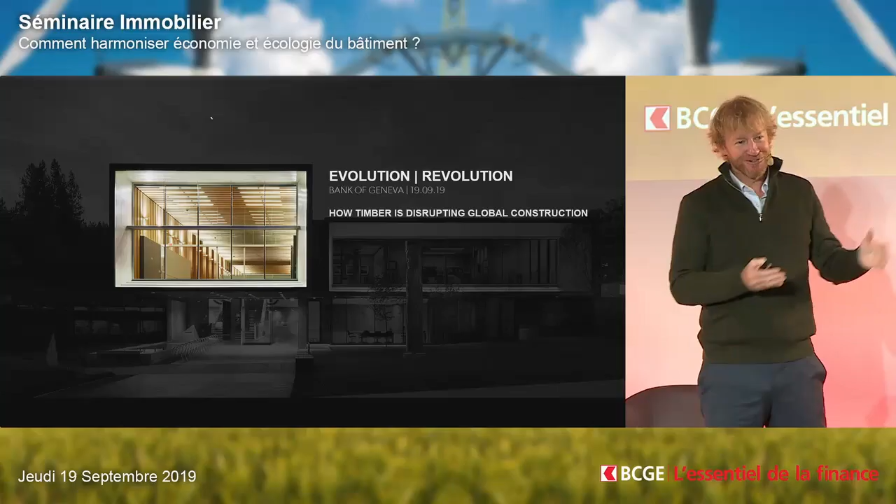Thank you for having me. My apologies, my French is not that good. I am from Canada, from Vancouver, but I grew up near Quebec, then on the west coast of Canada. Truthfully, you're better off learning Cantonese or Mandarin than French now, so I've lost my French, my apologies.

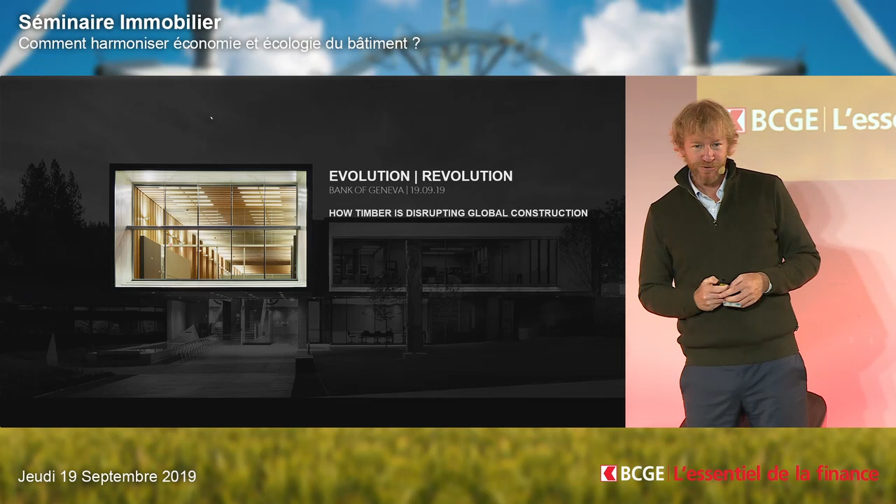It's a pleasure to be here. I'm going to talk to you today about wood and my architectural practice, and why we have chosen to be dedicated completely to the concept of building in wood. I call my talk Evolution Revolution. Wood construction is something we have seen for centuries, but not as much in the last century.

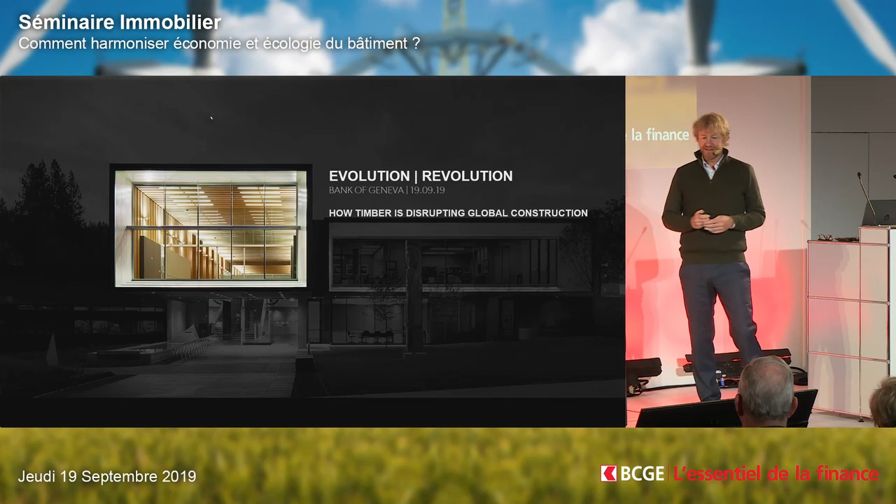And here in Switzerland, there's a great history. Why is this not moving forward? Well, we're not moving forward.

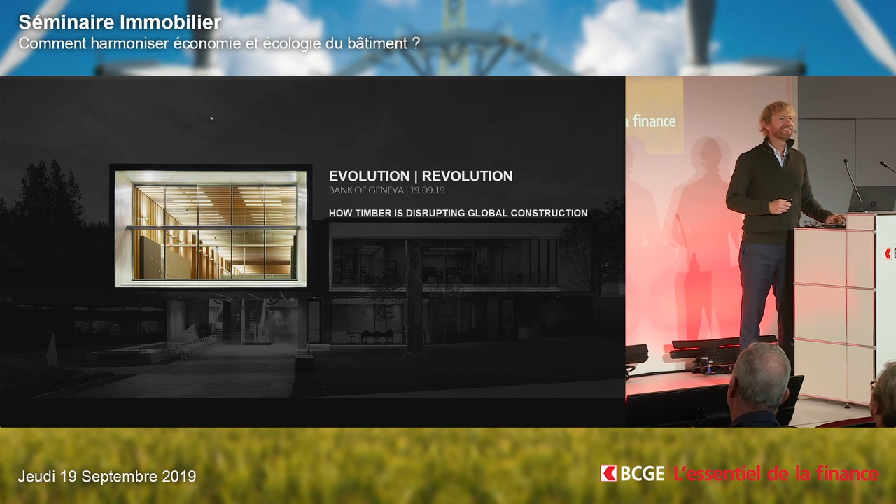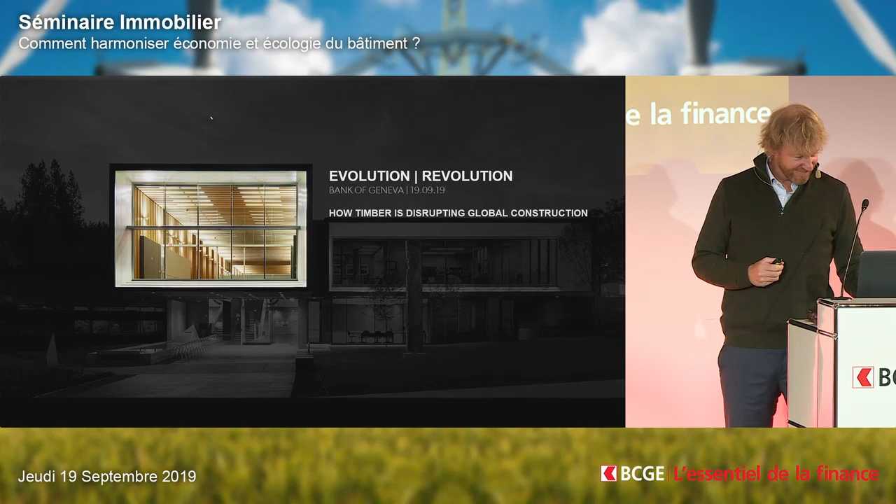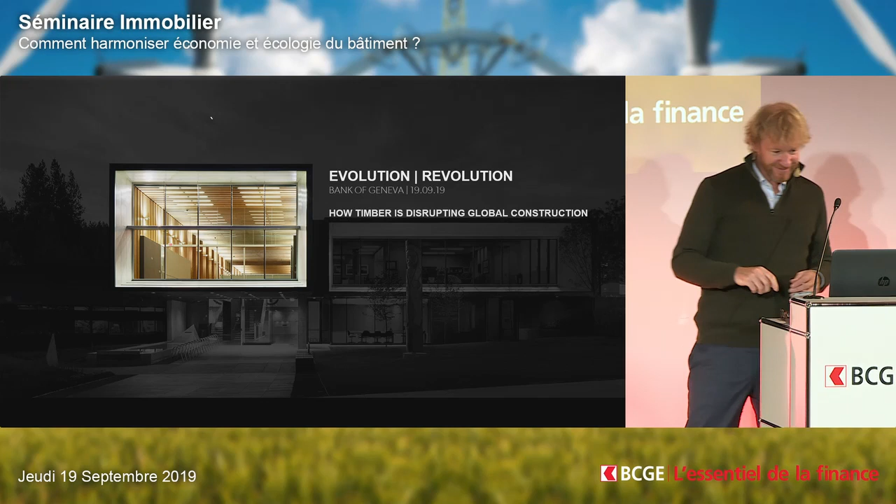I'll do it here. I'm frozen. Hold on, it was working before. I just froze, that'll help. I can do this entire talk without having any pictures, but the pictures are way better. So sorry guys, can somebody come give me a hand, this thing's not working? Oh, perfect, it's weird. Let me just talk while we do this.

So I started my practice in 2003 originally, and we were just a regular architecture practice until about 7 years ago, when I'd built a lot of things in wood and really started to understand what and why wood was going to become something that I felt this next century needs to focus on as a building material.

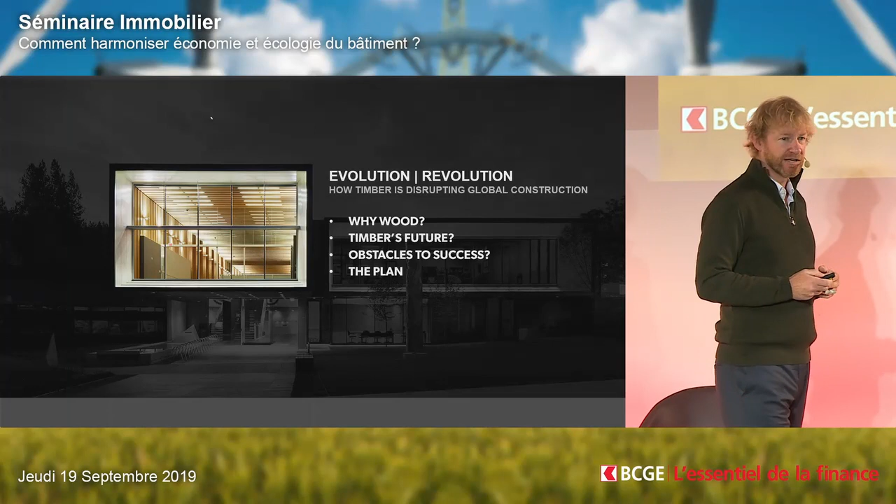So I'm going to tell you the story of why we are building in wood. As mentioned in the introduction, I run this firm, Michael Green Architecture. I also run this school, Design Build Research, which has a program called Timber Online Education, where we're trying to create a global free education program translated into 35 different languages, to change the entire system of building worldwide, educating countries especially that need to move towards greener building materials, like China, India, Indonesia, Brazil, and so forth. So we've built this program.

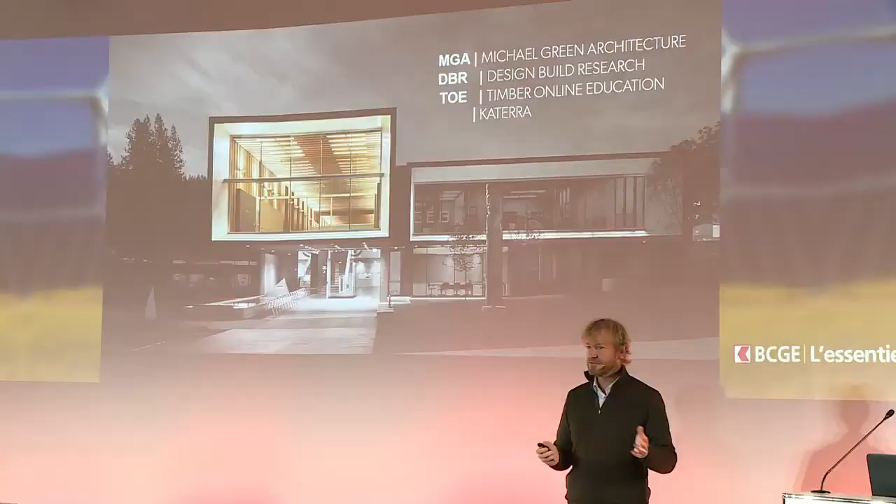And then finally, my practice, I actually sold it to a company called Katerra a year ago. So I still run the company fairly independently, but we have a relationship with Katerra, a Silicon Valley company about 4 years old now, that is trying to create shifts in both technology and off-site construction. I'm going to talk a bit about that because it's an important step that's starting to happen in the United States and elsewhere, especially here in Europe, but now finally in the United States.

So here we are, and I'm going to describe it, but 7 years ago when I started, I bought one of the first pieces of what's called mass timber. That piece of wood right there, that's my staff moving into my office when I started the firm, and that's what we call mass timber. Mass timber is the word we use for large panels of wood. Cross-laminated timber is something you've hopefully heard of already, but it's the change that's coming to our industry: these large panel products in wood.

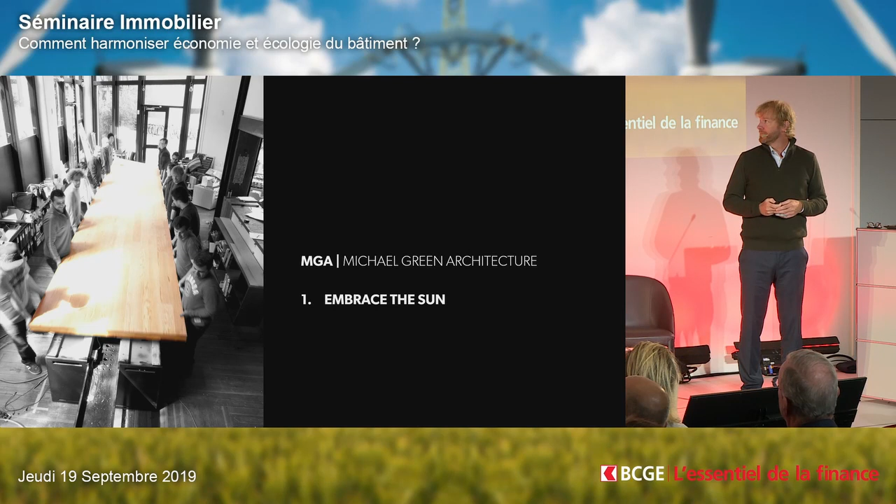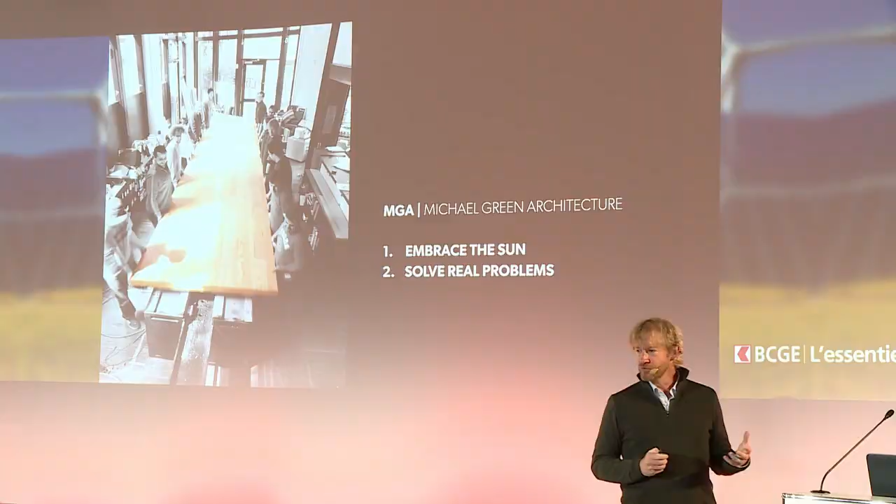And when I started the firm, we came up with a series of values we wanted to speak to. The first is embrace the sun. We only work in materials ideally grown by the power of the sun, so obviously wood is one of them.

We try to solve real problems. We try to innovate and share, which is why we have our school.

We believe that Darwin was right. What I mean by that is evolution, and Darwin's work, taught us that all species, flora and fauna on Earth, are fundamentally here to thrive and propagate while using as little energy as possible, and to find evolutionary ways to use less energy. The only species that has not done that is us, as humans. We do the best to use the most energy and then destroy ourselves. We're very good at this, but this has to change.

So our practice is focused on the idea that we design to use less, not more. And then finally, I always say that we have to be Canadian. What I mean by that is the work we design, as you will see, is very simple. It's very quiet. It's not trying to say, look at me.

It's trying to say that we need to be good neighbors. And that's, for me, what great architecture should do most of the time. Sometimes we should celebrate buildings, but much of the time we should be very humble and honest and quiet. And I think those are good Canadian values, so I always say that.

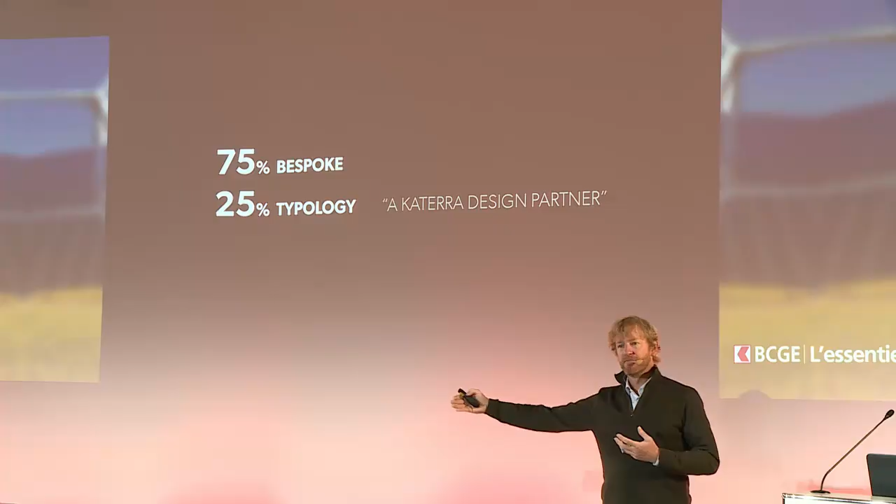We build projects all over the world. We're very lucky to do so, and about 3/4 of what we do are custom projects, and about 25% are what we call typological projects or repeatable projects. And that's where we found this interest in working with this company, Katerra, who are starting to look at the idea that buildings can be a product, not just one-off prototypes all the time, but actually something we can create some repeatability around to reduce the cost, which we think is important.

About 90% of what we do is mass timber, and about 10% is what's called light timber, light wood, which is what you see in North America a lot. It's less common here, but it's a very common way.

So the two main values of why we run the firm are climate and social impact, but really I'm here to tell you the story of why we build in wood.

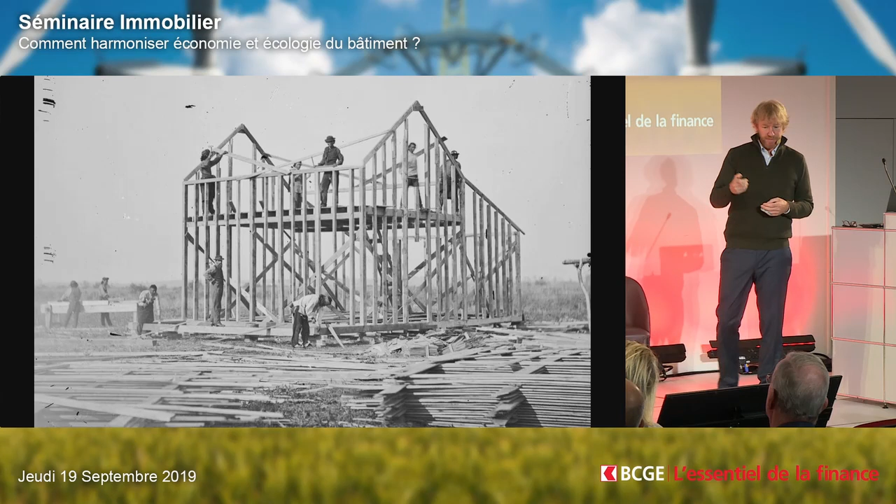In North America, we have been building in wood like this for 300 or 400 years. And really from the beginning of what we call the First Nations people, the Aboriginal people of North America, building in wood, there's been a change only in small ways throughout time of these lightweight wood buildings, eventually evolving into where we are today, which is advanced wood and mass timber.

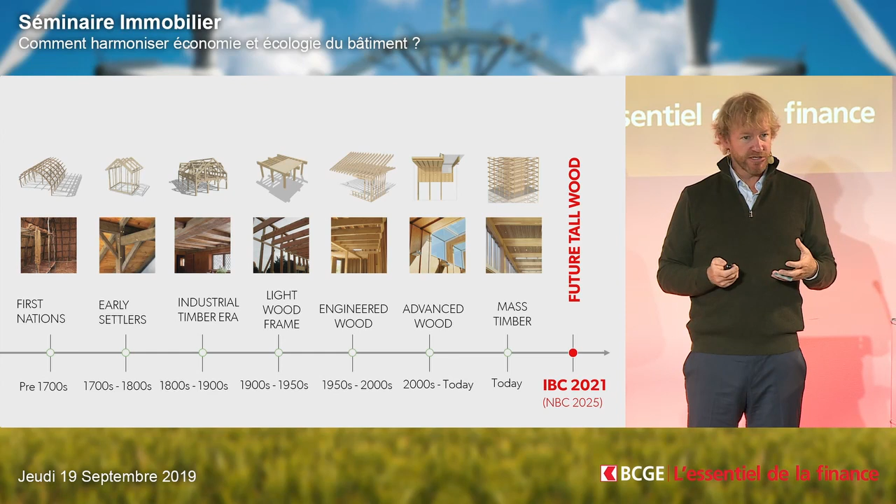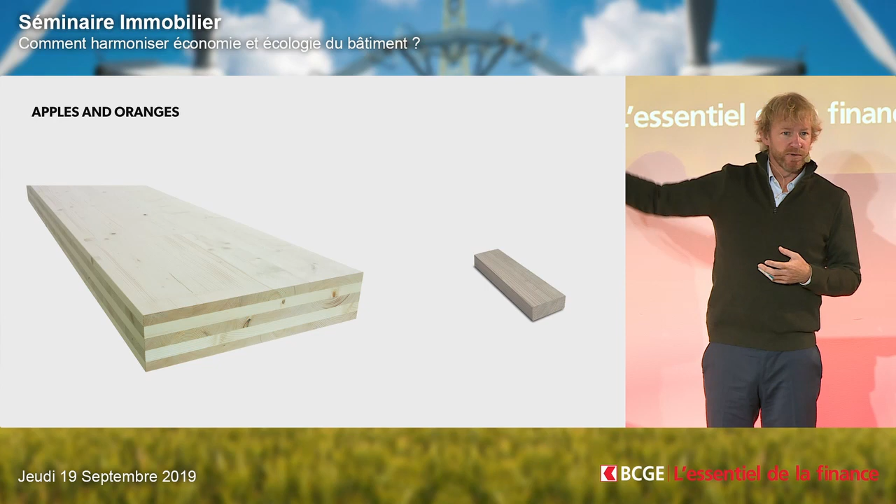Mass timber really started in Austria, in Germany, and to some extent here in Switzerland. It's a material that started to shift the way wood would be brought into buildings in Europe, but really around the small-scale residential market. We became really interested in mass timber because we were used to these small pieces of wood, and we were interested in what these large engineered wood panels might do for us in the construction market. It's really apples and oranges, because, of course, these big materials, when they burn, they're very resilient to fire, which means we can think about building much, much bigger buildings, which is really important.

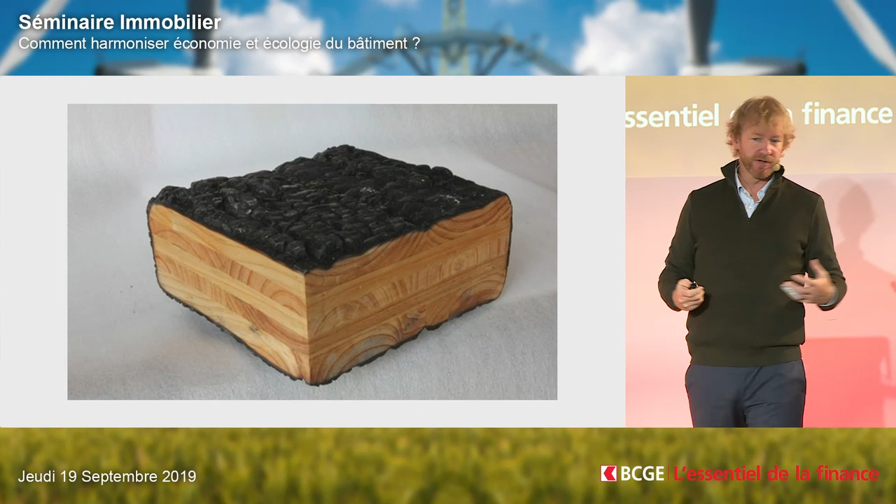So there's a whole bunch of types of mass timber. I won't spend a lot of time, I can answer questions about it, but these are all the different products that are now available, many of which are made here in Switzerland and made especially in Scandinavia, of course.

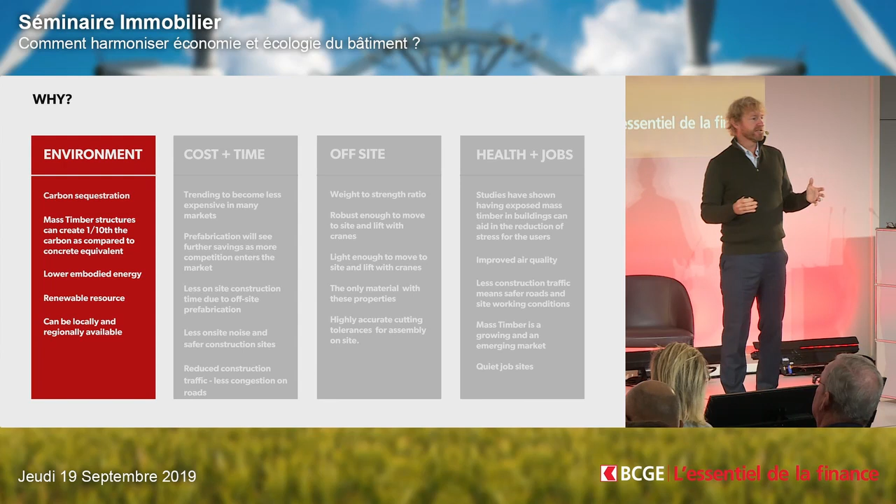But what I'm here to do is really tell you this story. What is it that makes us so passionate about the idea that my entire practice is dedicated to wood? I think we're the only architectural firm in North America that has said we are only going to work in this material. And it's these four things: the environment, cost, and offsite, and finally health and jobs. So let me take you through them.

So I'm going to walk you through the story. But first, for me, the biggest passion I have around the use of wood is about the issue of the environment and how we have to change.

So I'm sure you know these statistics. My apologies if you know them very well, but I'm going to repeat them because I think they're important to all of us in the room involved in construction. This is what we should be thinking every day.

Our industry is responsible globally for 40% of greenhouse gases, depending where we live in the world. In Canada, it's 50%. In the United States, it's 50%. I don't know what it is here in Switzerland, but I imagine it's probably close to 50% of the issues of climate change are related to our industry.

It breaks down like this. Many people think it's about transportation, and of course it is, but buildings are the primary issue. And when we think about that 39%, close to 40%, about 11% is the materials of the building, the embodied carbon, and 28% is operational. We talk about operational, how you heat and cool a building, all the time, and it's a very important issue. But what we don't talk enough about is what we make our buildings out of. I'll explain now why I think that's actually the more important issue.

But it relates to this, the scale, right? As a building industry, this is how much square footage—sorry, it's in square foot.

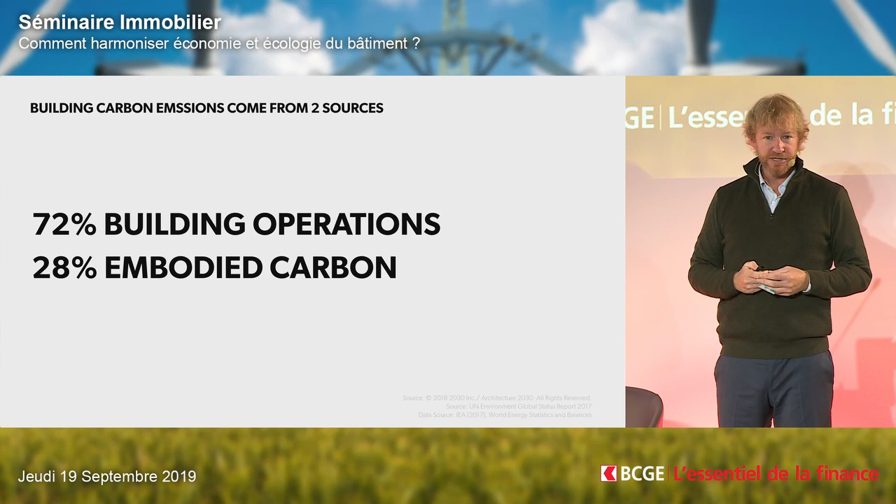So when we break down individual buildings, about 72% of the carbon footprint is operational, and about 28% is embodied material. And so people often say to me, well, why aren't you just focused on the operational? That's the majority. Well, the reason is because of what we call the time value proposition, and this graph really gives us a good idea.

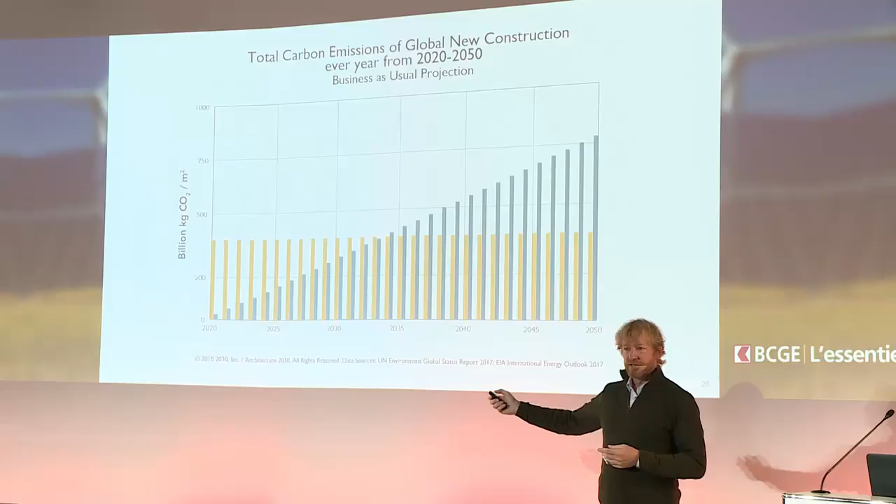The first day you build the building, you've built it with the materials - that's your embodied footprint. So day one is the yellow on this chart. Of course, over time, heating and cooling is adding up your carbon footprint. The intersection of those points, in this particular example, is roughly in 2035.

So for the first 15 years in this example, the most important issue is actually what the building's made out of. Now, by changing our sources of heating and cooling, our energy sources towards green energy, we have the opportunity to reduce the curve on the blue. But currently, we have no conversation really happening globally about the fact that day one, the embodied impact is our carbon footprint and is currently unchangeable.

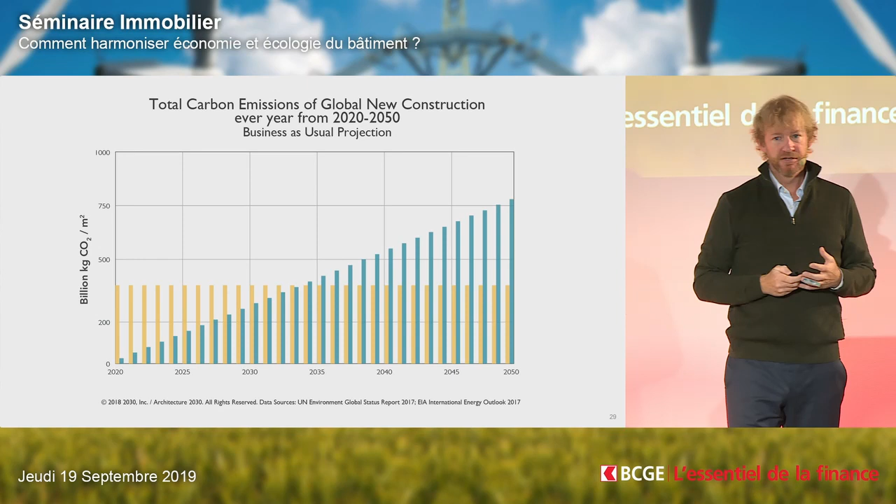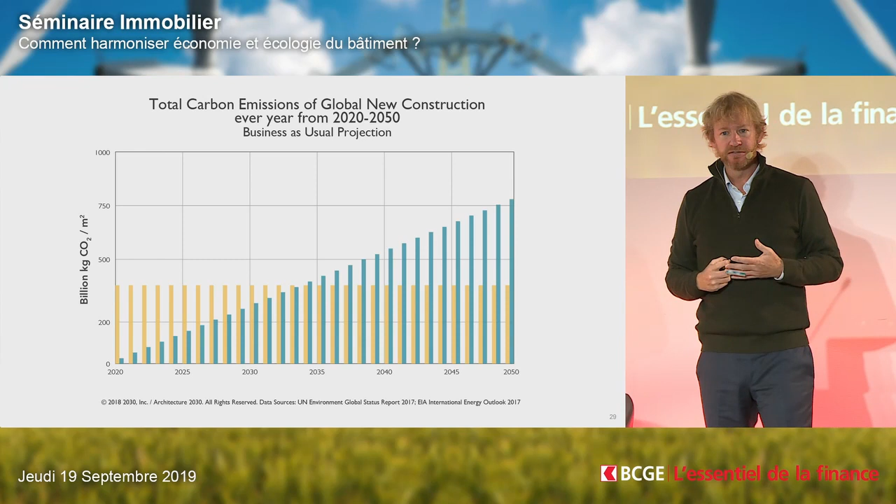Every material you put into a building, unless it's been grown by the power of the sun, has a very large carbon footprint. So there are materials that are inevitably going to go into the building: glass, aluminum, steel, concrete. These materials have high carbon footprints. So I'm always looking for opportunities to flip that around.

Now, again, you probably all know these statistics, but I like to just put them there, and that's the IPCC's focus on telling us how do we get to 1.5 degrees centigrade change over the next century. This was the goal that IPCC told us. To get there, we need to peak today or next year, and be down 45% by 2030, and then net zero by 2045 to 2055.

Now, I understand Switzerland has a goal of 2050 being net zero, and how you get there is obviously very complicated. And the reason I'm here to talk about buildings is that the only way we get there is by changing what we make them out of.

So to get there, I think is unrealistic. We are not, unfortunately, going to get there. We can't transform the building industry this quickly. We can't transform a whole bunch of industries this quickly. And sadly, I think many of us now believe we're going to end up at 3 to 4 degrees centigrade change over the next century.

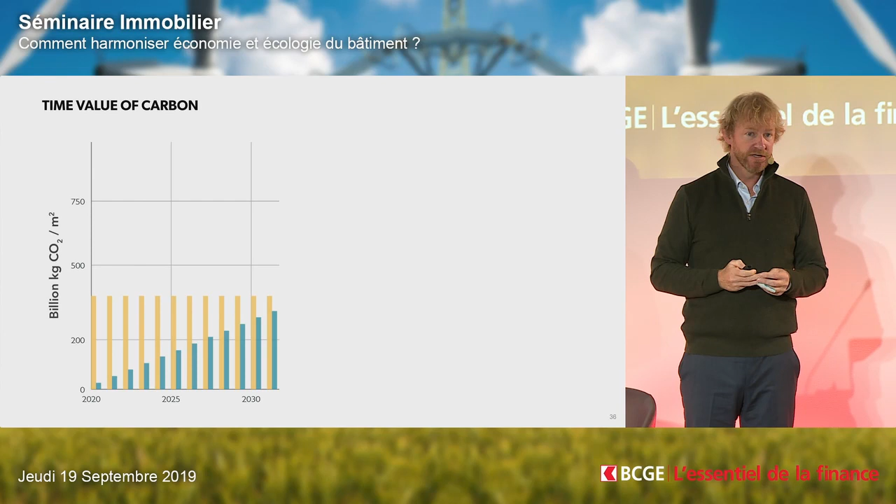In Canada, the federal government just released a report that says that in Canada, we expect 6 to 12 degrees centigrade increase. This is because our north is melting - we're not holding as much snow throughout the year, we don't get the reflective qualities, and we're going to release an enormous amount of CO2 from our tundra melting. This is catastrophic from an environmental point of view for our country, though it's a different story depending where you are in the world. But for us, we will see the highest temperature changes of almost any country in the world. So it's a big, big deal.

So what you can see is the issue of what you make a building out of - the embodied story of that building between now and 2050, when we need to get to net zero, is roughly 50% of the conversation. But it's really not been 50% of the conversation.

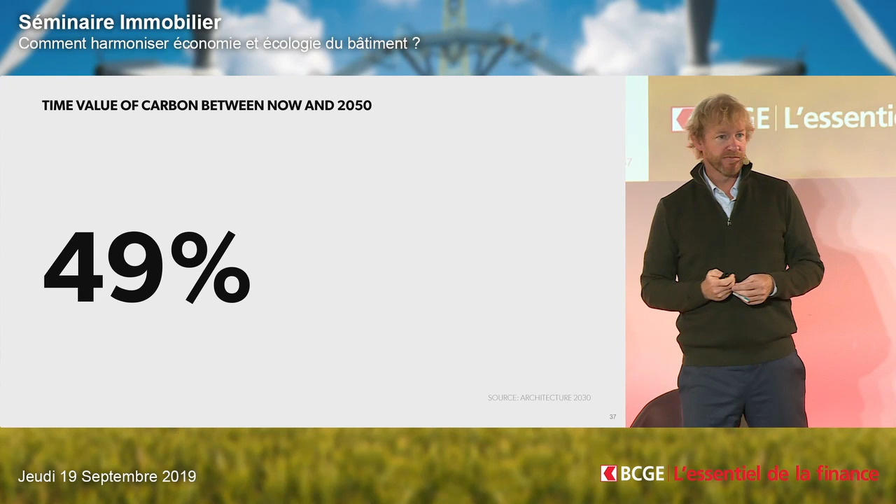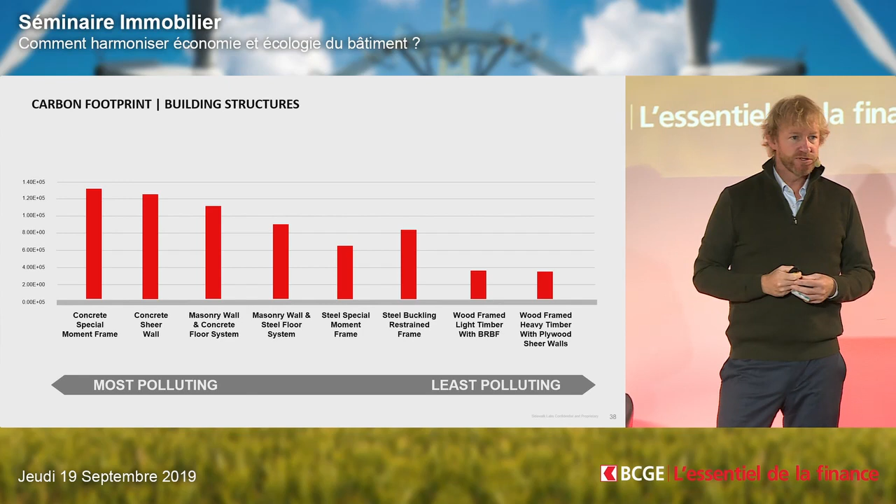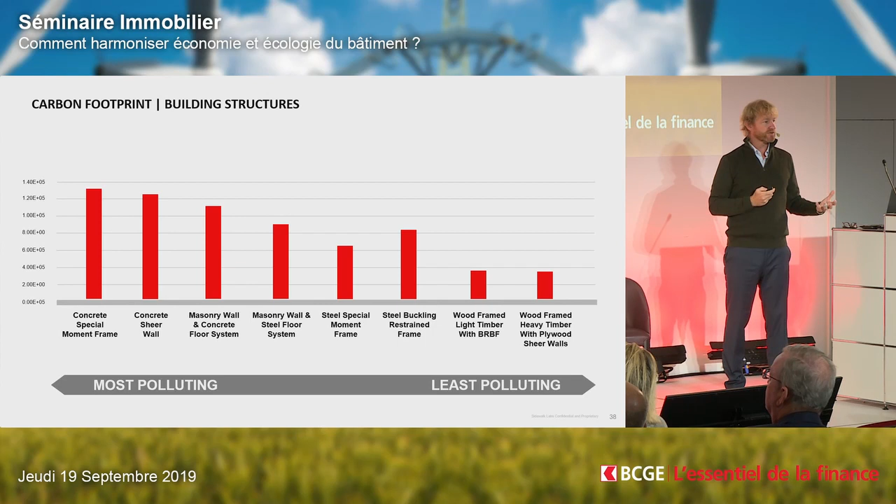It's been a tiny, if at all, part of the construction industry's conversation. And the only way we're going to address that is by the choice of materials we put into our buildings. This is a really good example—it shows each of the materials typical to common building practices, with concrete way on the left there and mass timber way on the right, as far as the strict choice of your structural system and what that might mean from a carbon footprint point of view.

If you don't know the statistic, it's a really important one. The reason wood construction is so effective is because 1 cubic meter of wood stores 1 ton of carbon dioxide. So the two things we do to counteract climate change are: we find ways to reduce our greenhouse gas emissions, and we find ways to store greenhouse gases.

Wood is the only major building material, and certainly the only structural material I can choose from, that does both those things. Concrete and steel together represent almost 11% of man's greenhouse gas emissions. So concrete, for me in particular, is a wonderful material, but one I need to dramatically reduce in my buildings in order to make a difference and help us reach these ambitious goals.

That also requires that we come from certified forestry. This is less of an issue here in Europe, where forestry models are pretty good, and in North America, we're pretty good too. But much of the rest of the world has real challenges around where wood comes from—deforestation in particular represents another 20% of man's greenhouse gas emissions. So the last thing we want to do is build buildings out of wood coming from the wrong place, from unsustainable forestry practice.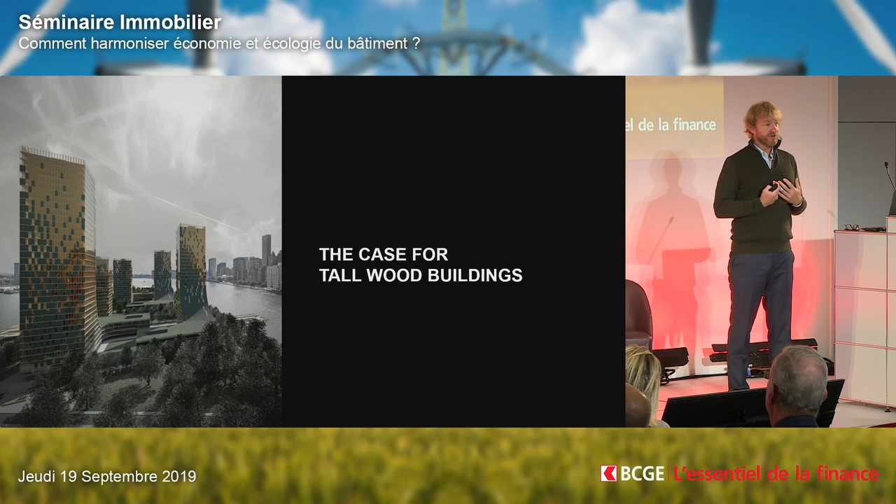So we found urban solutions, and about 12 years ago now I wrote a book called The Case for Tall Wood Buildings—it's the reason we should start building big buildings in wood. We put it out there, and truthfully, the industry and my peers thought I was crazy. They thought there's no way people would ever build buildings like this.

So we proposed—this is in New York City for Cornell University—the idea of building 30-story tall buildings made in structures entirely of wood. We sat down with some very good engineers to prove that was possible. And again, people just told me it wasn't possible.

Well, 139 years ago, the first skyscraper was built—and it was built in Chicago.

Chicago invented the elevator, so they were able to start exploring this idea of building bigger buildings. The first tall building was made, of course, in wrought iron, and it was made 10 stories tall, and people at the time thought it was so big and so scary that they wouldn't walk across the street near it. They thought it was an impossibility, right? And now, of course, we look at 10 stories and think nothing of it.

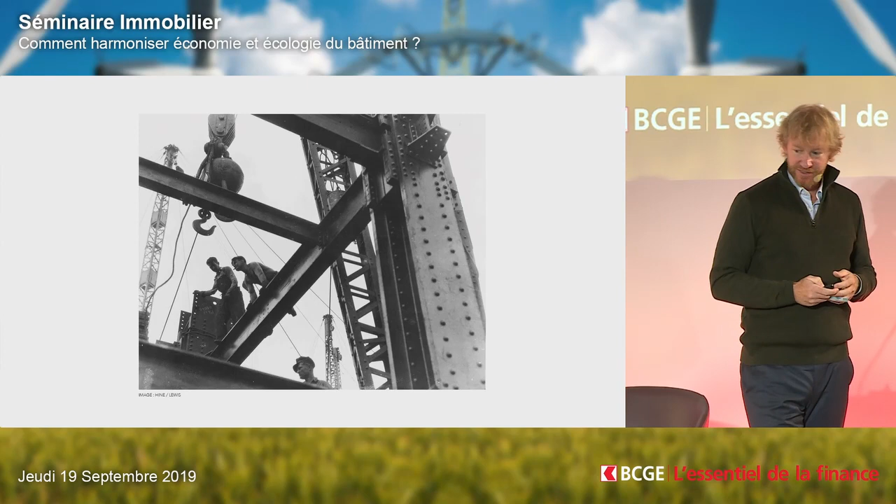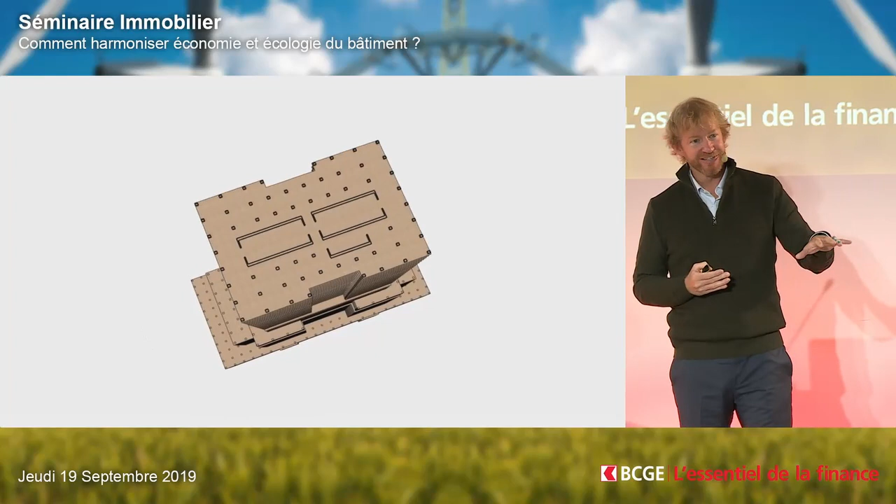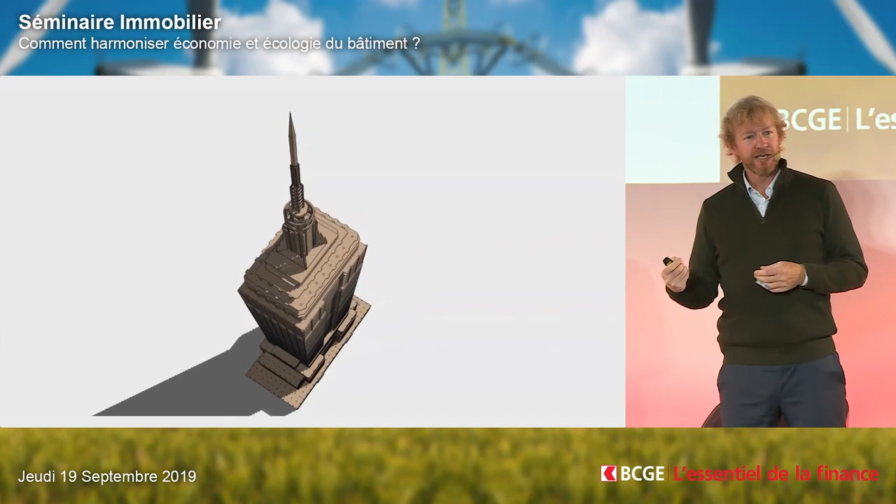So we did an exercise to tell the story of how this is possible. We worked, again, with some very good wood engineers, some of the best in the world. By the way, Switzerland also has some of the best, if not the best, wood engineers in the world. People that are my heroes are here in Switzerland. But we sat back and we said, well, how do we communicate the idea of what you could really do? How big a vision could we attach to the idea that we can take this material known for building barns and farm buildings and small houses and say, no, we could do much more?

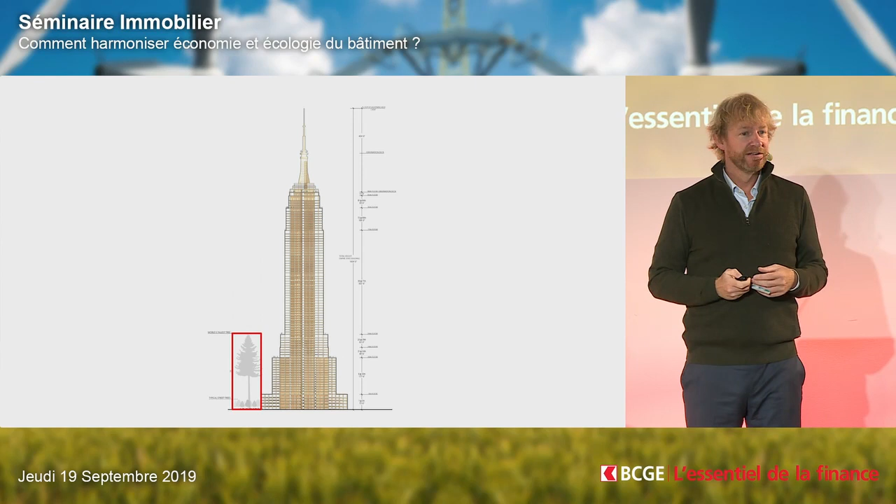And so we showed that this building that you all recognize could have been built entirely in wood. And technically it could. And it's 102 stories tall. And when people say that's ridiculous, I always point out that where I live, this is how big the trees are. And it only takes 3 of them to get to the top of the Empire State Building. And so, of course, it's possible for us to take this amazing natural material and really understand it, its properties.

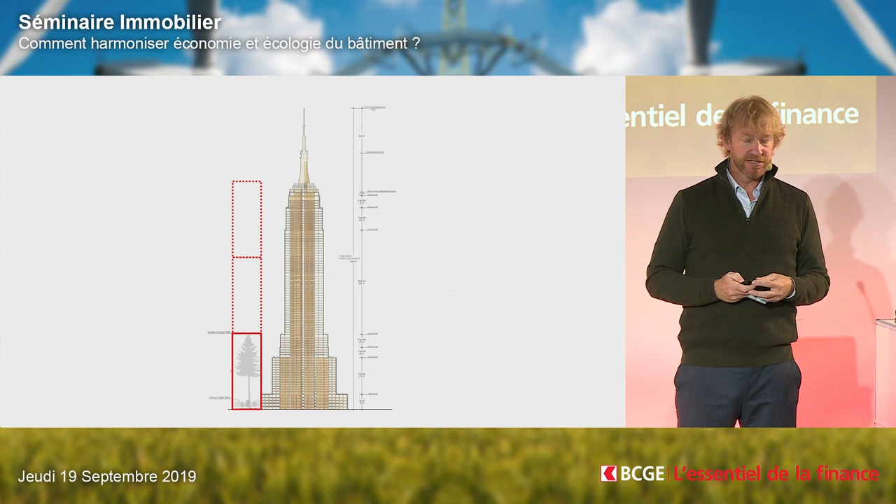And figure out how to do something much different with the way we build our cities. So we developed these ideas, and it really is the first new way to build a skyscraper in a century. And although my peers thought this was crazy, we spent a ton of time trying to change the way the public thought about these buildings. And what happened, to my surprise, is that in a very short amount of time, we have seen building codes all over the world start to change, and very quickly.

Because I think this intersection of the idea that we have to solve climate issues, we have to solve urbanization issues, we have to solve population growth issues, we need to meet human needs, and we need to do it in a way complementary to the carbon issues we deal with, meant that this is a problem that has a proper solution.

And so in Canada, our building code changed for next year that allows us to build 12 stories tall. We are already planning buildings much bigger than 12 stories in Canada.

But I'll just show you, this is the first tall wood building we did, and the second one in the world. The first was in the United Kingdom, in London, by Andrew Waugh. But this building was our first one and the first in North America, and it's not very tall. It didn't need to be. It was in a very small community. But we wanted to show its possibility, and so this building has nothing but wood after you leave the ground.

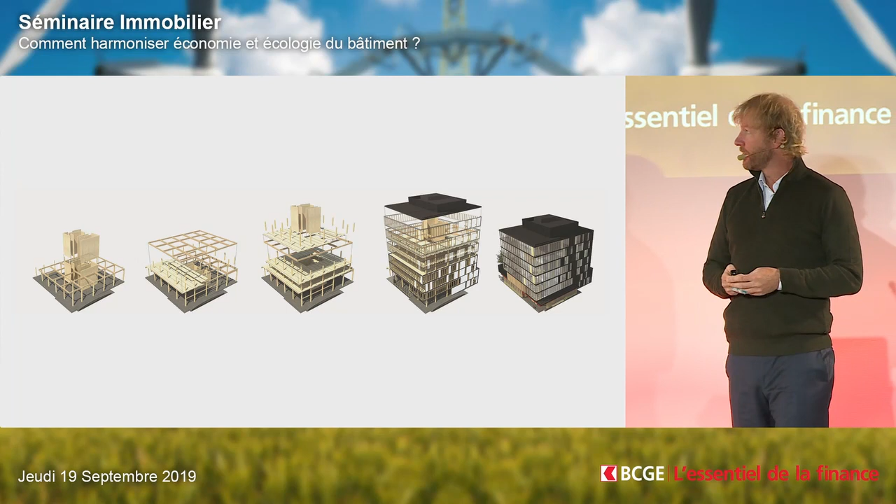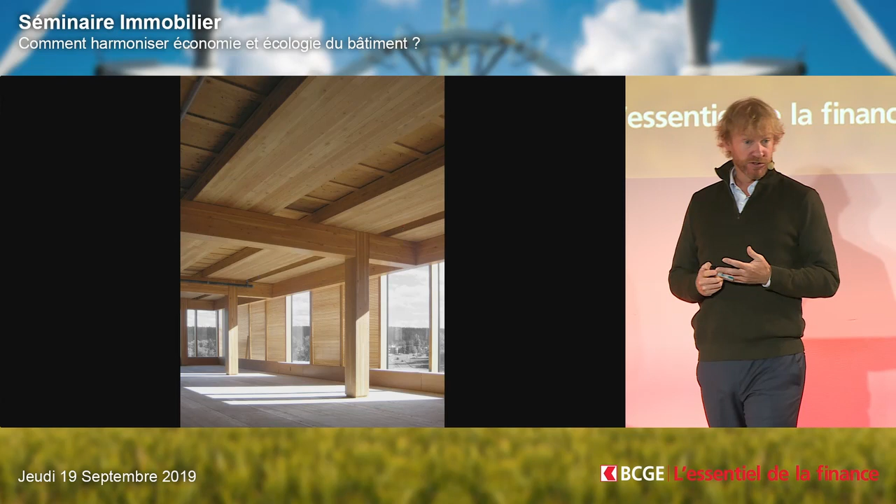So the foundation is concrete, but 100% of the rest of the building is made in mass timber and engineered products. So I won't go into the details of exactly how it was built. I'm happy to answer questions about it. But it's an office building and a university building as its function. It was built with a lot of flexibility to run services through it so that it would be as good or better than any other kind of technically performing steel or concrete building. It's a very warm and beautiful building that we're very proud of.

But what's really exciting about this kind of building is when we did 2 major studies looking at the life cycle of the building, how from the very, very beginning of where the products come from, to the erection of the building, to the operating of the building, and to the dismantling of the building, in this case over a 100-year period, what we were able to demonstrate is just by the simple fact that we chose products from wood and grown by the sun products rather than steel or concrete, we could reduce the carbon footprint of this one building.

By 88%. So now think back to the idea that we all have to build one New York City every month for the next 40 years. This matters a lot. This is the way we get there.

And for now, this is the way we get there. When people ask me, yeah, but what about this deforestation issue? Aren't we going to cut down the world's trees if we do this? Yeah, there is a threat we could, and we have to do this very well and very responsibly, and we really need to be educating our foresters around this.

But a wonderful statistic is that building I just showed you, the North American forest grows enough wood every 4 minutes to build that building, right? It's really astounding to think about.

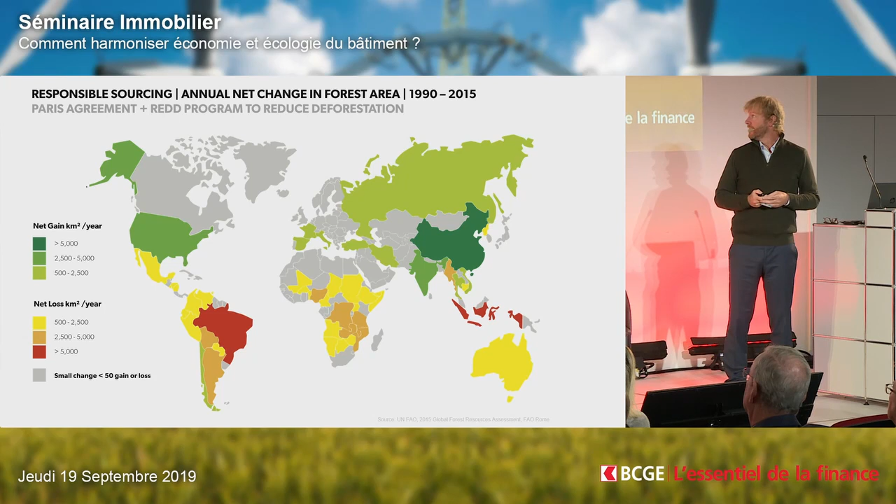We actually think that this is part of the story. We're really invested with our school, Timber Online Ed, around the idea that if we can take countries like Brazil or Indonesia and teach them to build with their wood products, that there's actually an incentive to not just cut down trees and turn it into agricultural land or grazing land.

I don't know why I lost the screen. But there's actually an opportunity to use their products, regrow trees, and actually do what the United Nations has been trying to convince them to do for a long time, and create afforestation — take agricultural land, convert it back to forest, because we can change the land value proposition for them such that forestry, because it can be sold into their construction market, actually has a huge economic return.

And countries like Brazil and Indonesia, we can use eucalyptus trees that take only 7 years to grow to maturity to build huge structural products. A 7-year growth cycle is a game changer for the Amazon.

And we have to convince them, but first we have to change their entire building culture away from concrete and towards wood. So the story is really interesting, and it's a global conversation, and I hope you will join me in starting to think about your buildings being built this way.

But I recognize also for many of you, it's not just about the environment, it's also about cost. So let me walk you through that.

So the big change in these products is that they are built obviously in a fabrication plant. They are then cut with CNC cutters, so they're highly accurate. They're built, they're manufactured off-site. When they're brought to the site as panels, they fit together very efficiently and very quickly.

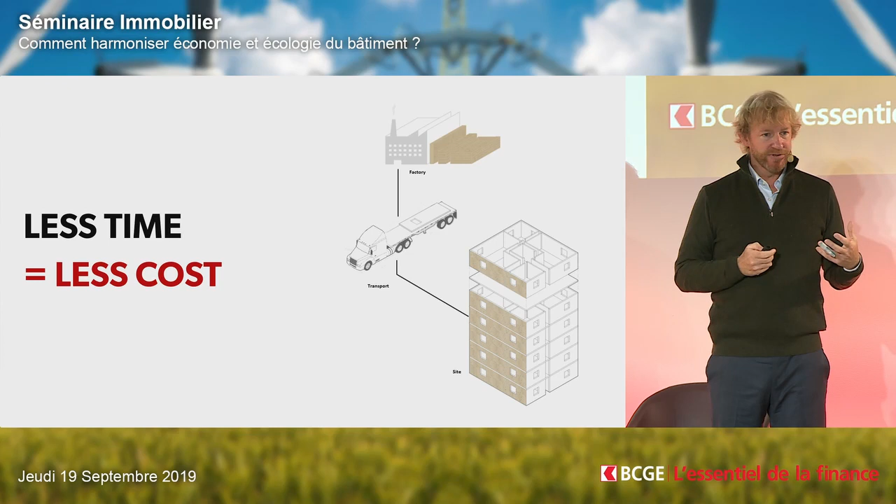So the big change from a cost point of view is the length of time it takes to build a building is greatly reduced. In the example of that building I showed you, traditionally it might in our environment take 18 to 24 months to build. From the beginning of design to the end of construction, we did it in 13.5 months.

So we're able to shorten every aspect of the construction process, which from a financing point of view starts to be something important for you to consider. And reducing that time, you can obviously fill the building quicker and so forth, which means we have to also think about the cost of these buildings differently than the way we think of others.

I'm not sure how you all talk about cost of construction, but in North America, we talk about cost per square foot, and we only really talk about the construction cost per square foot. But what we need to talk about is the project cost per square foot, which is not part of our current culture. But why that has to become part of the conversation is if we reduce the time, it is not captured in construction costs.

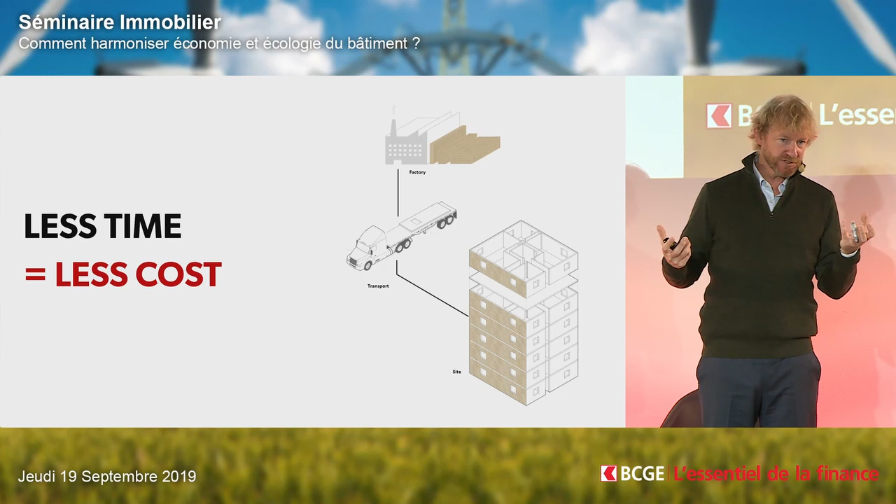It's captured, obviously, in finance costs, in management costs, all these other project costs. And then these buildings become very, very economical.

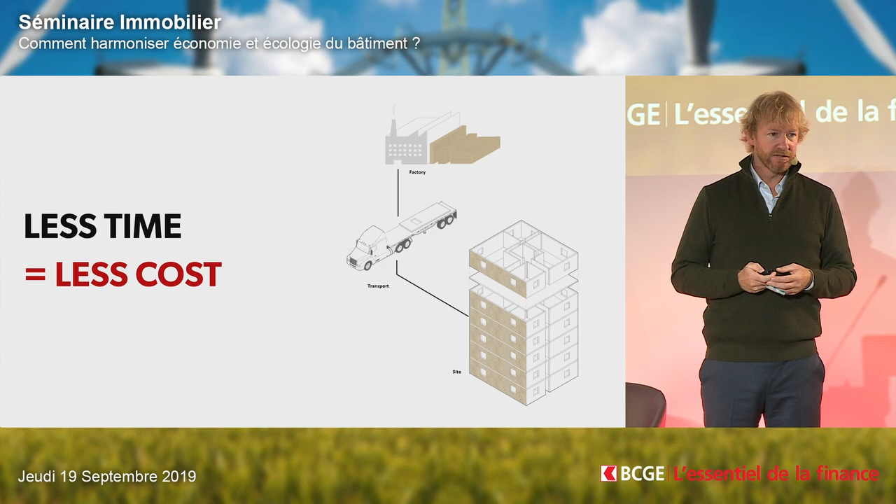It's also fundamentally, I believe, the best material to really unlock the problem of building off-site. I often talk about how I get to design a building in a nice warm space, and then the poor guys that build it are building in the pouring rain or the snow. It's pretty tough construction building outside, and it's very inefficient, right?

Construction sites are very unpredictable because of weather conditions, delivery conditions, all of these issues that you all as builders understand are very complicated and very expensive.

So moving towards off-site, and the more we can do in a factory obviously means that we have an opportunity to lower the cost, increase the quality, reduce the waste. These are all really important steps for us.

Why I think mass timber is such a critical part of that is steel and concrete are too heavy to build in a factory. They really don't work. We have some precast concrete and so forth, but it's a very heavy system for off-site construction.

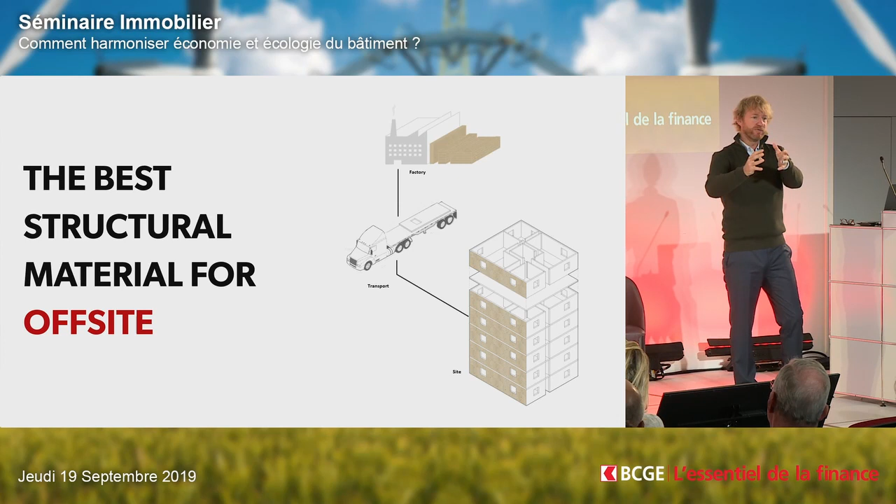Light wood and light steel do work for off-site construction, but they tend to be very flexible. So when you build either a volume or a panel in a factory and lift it onto the truck, it'll twist and rack. You can't put all of your finishes on it because you have to expect movement while you drive down the highway or lift it by crane into the building. That movement will cause cracking, things falling off the walls, or you have to put in a lot of temporary braces. What that means is that material, although light, is just too flexible.

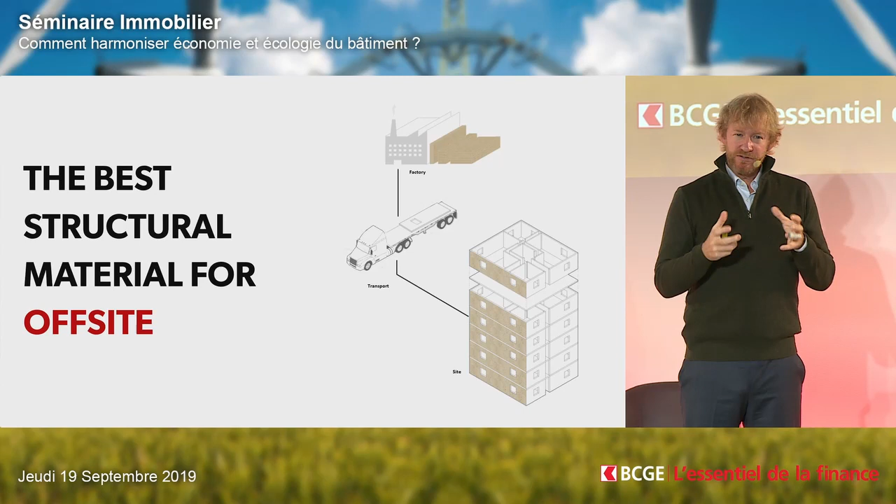So mass timber sits in this perfect sweet spot where it's both robust enough, strong enough, and accurate enough to be cut in the factory and allow you to complete the finishes on it. And when you pick it up, it's not going to be flimsy, but it's light enough that you can pick it up, unlike steel and concrete.

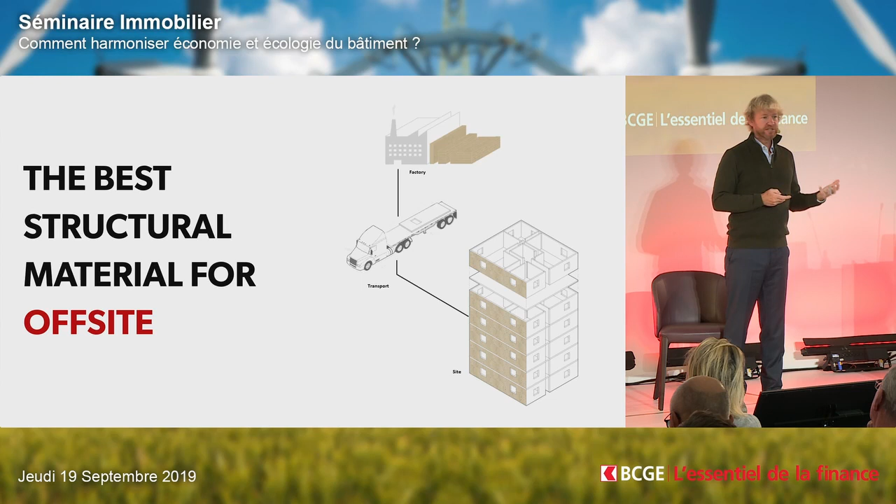So it resides in the perfect place for bigger buildings, not for small buildings, from an economic point of view, at least for us in North America. I really mean buildings taller than 6 to 8 stories and bigger, typically, or institutional buildings, big buildings like that. As I said, we were able to build this building in 14 months, which is very unusual for us.

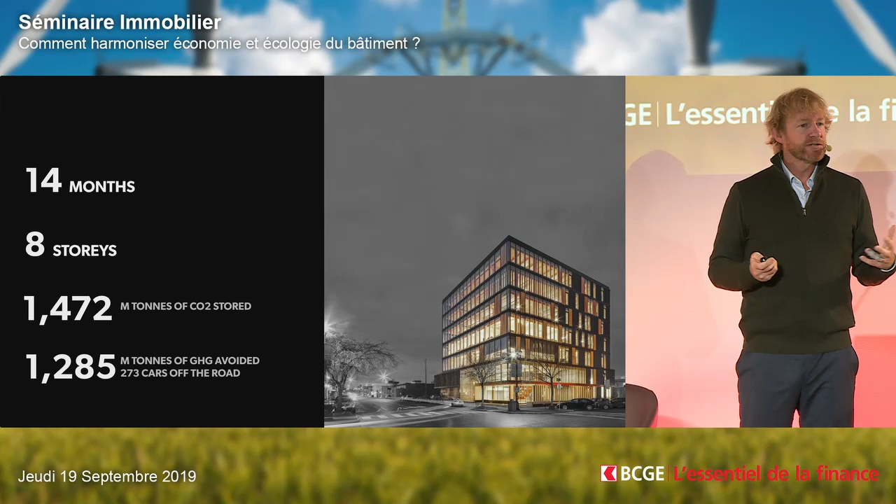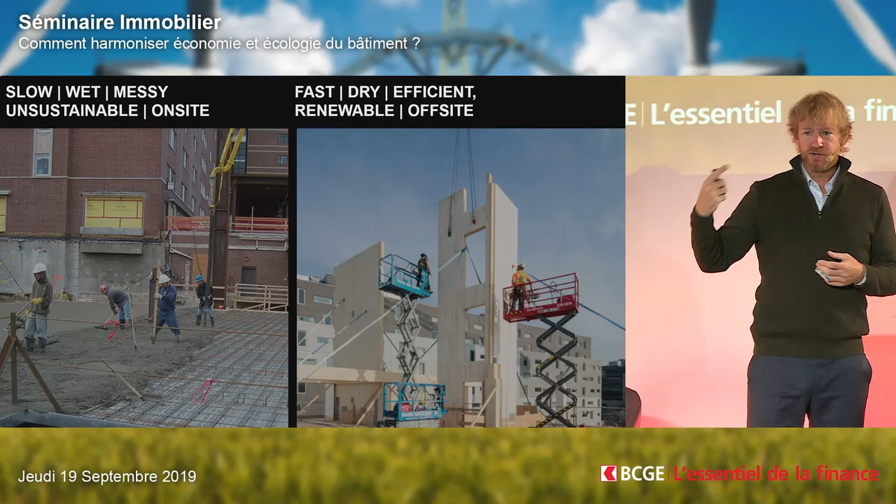A big part of it is the difference between building with wet construction, concrete, where you're constantly waiting for things to dry, versus dry construction, which means you never are waiting. You can keep the trades working at all times. So that's part of the story of cost.

The other story is really health and jobs. I think whereas the construction industry for the last decade and a half has talked a lot about the very important issue of environment and sustainability, we are starting to move into a generation, and I think Switzerland is also a leader in this, of thinking about our buildings as being fundamentally part of health and well-being.

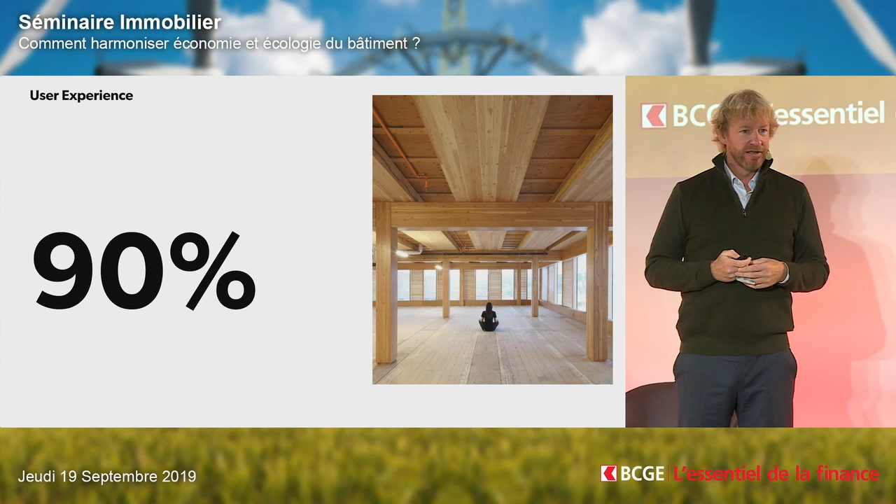So we can choose building materials with low VOCs that don't give us poor air quality, but we can also choose materials that actually nurture and create healthier environments for our kids and for people that are sick. We spend about 90% of our time in Western cultures inside buildings, and we are surrounded with what I think for the last century has been these artificial man-made materials. We don't really know the human health effects of all of them.

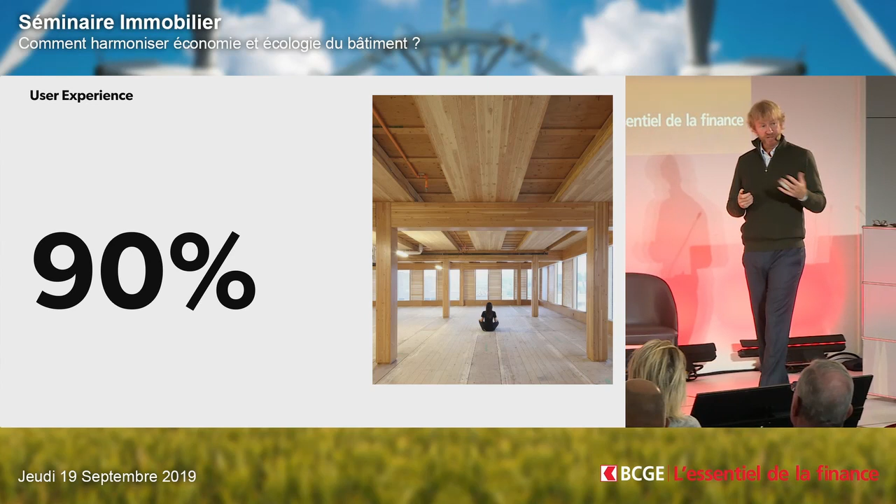We think we know, but we don't. We learn constantly that materials like asbestos maybe weren't such a good idea, or lead maybe wasn't such a good idea. We slowly learn what works and what doesn't work. But what we know does work is the materials our species has lived around for millennia, which is natural materials, stone, wood.

And what we also seem to know, and the social science is showing us, is that when we work in wood buildings, we are more productive. When we learn in wood buildings, we learn more quickly. When we are healing in wood buildings, it reduces our stress levels and we heal quicker.

So we're seeing a whole bunch of building types, from schools to wellness centers, hospitals, spas, universities, all realizing that this dynamic of what you're building and the space around you is informing not just how you feel, but actually how productive you are.

And so we're working now with Silicon Valley companies that have done a lot of research into this, where they start to understand, well, human productivity is exactly what we're in the business to do. If I can get 5, 10% more out of my team because they're happier and more comfortable and have less stress simply by choosing a material that happens to also be good for the planet, why would I not change my entire portfolio of buildings to building this way, which is exactly what they're doing.

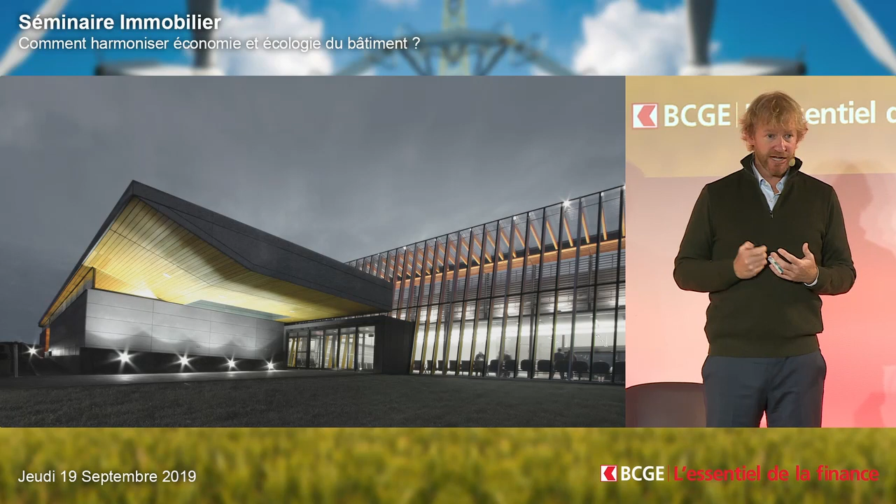So I'll just show you a few more buildings. We've built airports. This is City Hall in North Vancouver, where I live, all in different types of mass timber products. I'm just going to go quickly to make sure I can focus on other content. But just to give you a feel, these are the kinds of products out there that allow us to build really beautiful buildings and really quiet, simple buildings.

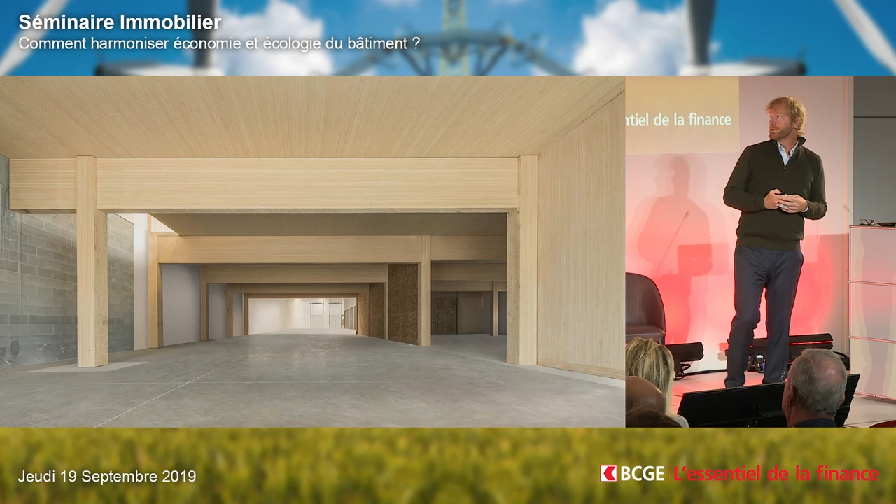This is a material made in British Columbia, it's like plywood. It's called laminated veneer lumber. It's incredibly beautiful. In this case, our client, this was built into an existing building. This is the first time the material was used. But the client said, I don't want any drywall, I don't want any paint, I just want this material. So we built every wall panel, every door out of this material, filling this existing space.

When we were asked to design this project, it's what's called a Ronald McDonald House. You may associate that with the restaurant McDonald's. It's actually a home for families with kids with cancer. It's a very, very important charity that does very good work. Basically it means that if you live in a small community in British Columbia or the Yukon, another territory of Canada, and your child gets sick, you actually are flown that day to Vancouver, where our children's hospital is. And immediately your life is turned upside down.

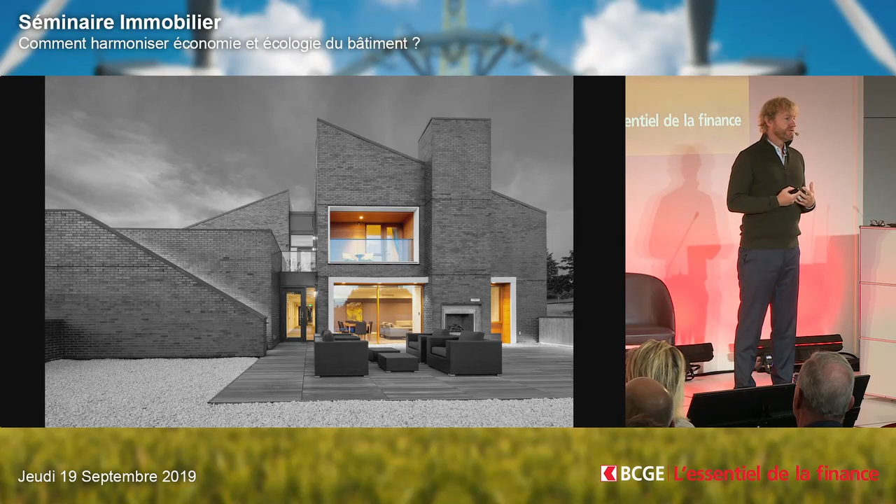This is a home you can stay in for very little money, $7 a day, be surrounded by other families going through what you're going through, and you often are there for 2 years of cancer treatment with your children. When we built this, it was huge - actually for me one of the most important projects I've ever been involved in. What we realized is we also wanted to demonstrate other things. We wanted to innovate socially around how families would integrate, and I unfortunately won't be able to talk about that, why I think we did some really special things there.

But from a technological point of view, we also wanted to demonstrate something really important: in North America, I needed to tell a story that these materials aren't just there to build skyscrapers, which we're doing, or big commercial buildings - they're also there to build institutional buildings. I think if you're a university in the United States, this is the way you should be building. 100% of universities in the United States that have a carbon agenda, a green agenda, must move towards this way of building. And so we wanted to show it was possible.

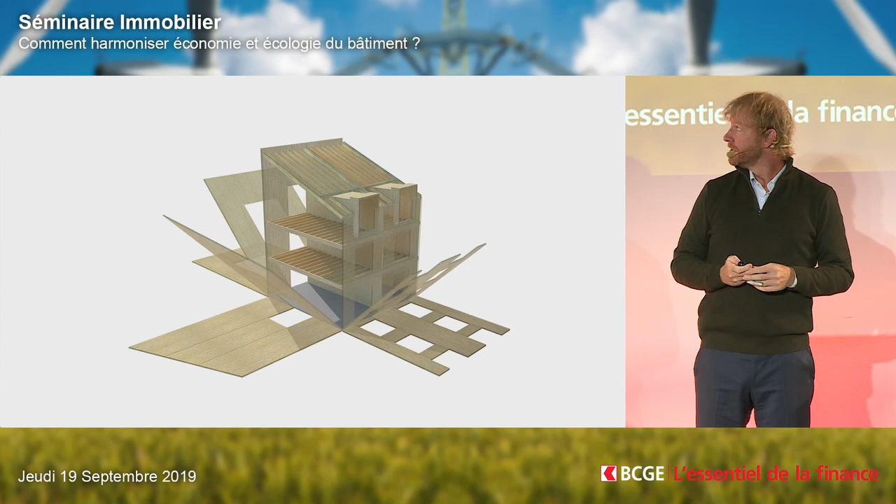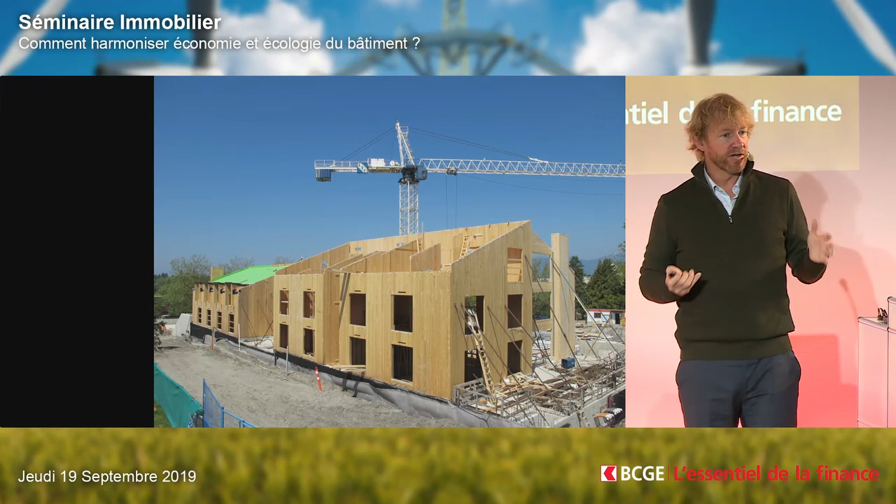So although that's brick on the outside, it's entirely made with cross-laminated timber on the inside. So we took these panels, 20-meter panels, and tilted them up, and then used what we call light wood cassettes for the floors. And there it is under construction. We covered it in brick because we live in a very rainy climate, and brick is a very durable, long-term material, and I wanted this building to be a 200-year building with no maintenance, or as minimal maintenance as possible.

By the way, this is also passive house building, so we do tend to move towards, wherever possible, designing either near passive or passive house, which of course here in Europe is also much more popular than it is at home for me.

In our city in Vancouver, which wants to be the greenest city in the world and talks as though we are the greenest city in the world - I think we have some room for improvement - we have a new carbon policy with 6 major points, and that's going to deal with mass transportation, obviously roads and the number of cars we have and the shift to electric vehicles. All these things are part of normal conventional city planning of any green city.

What's really great is that one of our 6 points is going to be a 40% reduction in the embodied carbon of buildings. What that means is the skyline I live around of concrete buildings, including concrete towers, must change. By 2030, if we enact this policy—we still have some ways to go politically—a 40% reduction in embodied carbon forces the hand of every builder to rethink what they make buildings out of, and will move us to being a mass timber culture.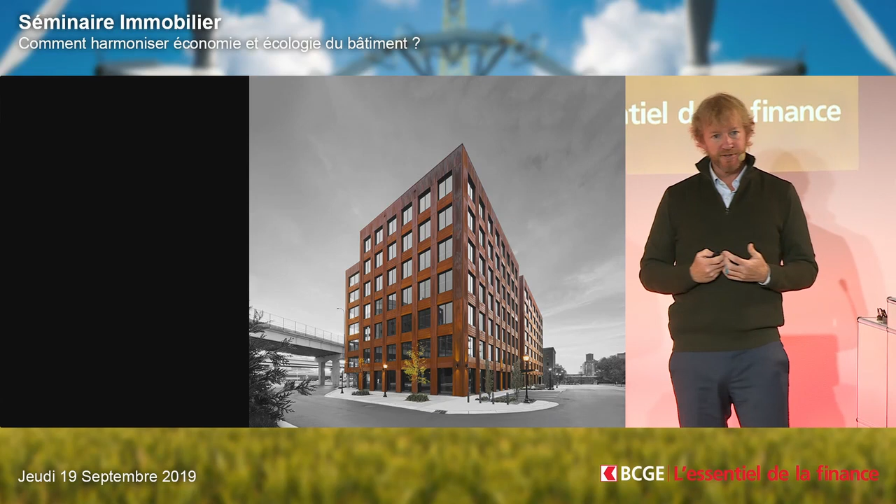So I've got only a few more minutes. I'm going to take you through what's happening in the rest of the world. In the United States, the building code has now changed—or will change in 2021—to allow 18 stories in wood. This is one of our projects in Minneapolis. This is the first tall wood building in the United States.

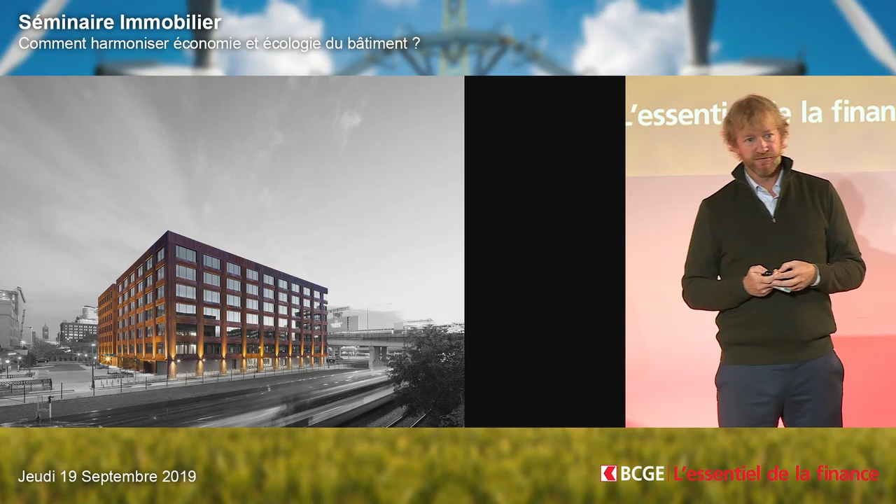Again, it doesn't really look like it—it's built into an industrial area. But the game changer for this is that it was built by Hines, who, if you know Hines as a developer in the United States, is a very big player. They have built 1,800 skyscrapers in their portfolio, so they are very good at this. They own a lot of big buildings in the United States.

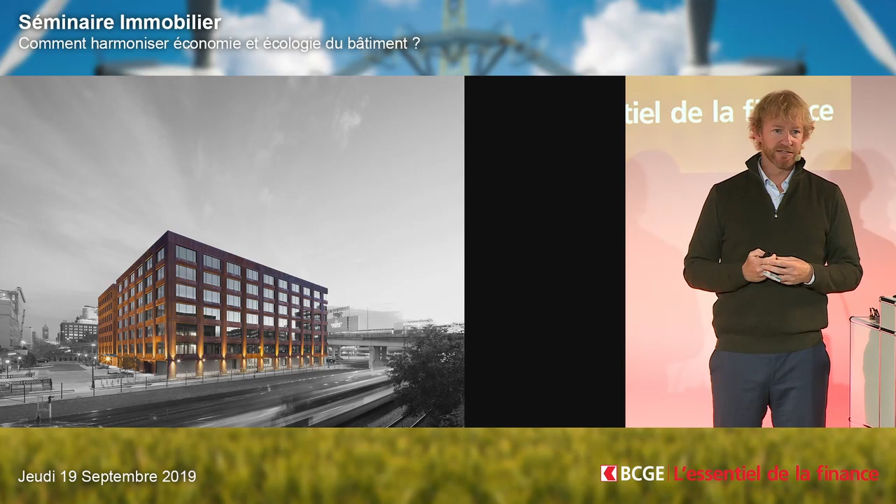They turned to us about 4 or 5 years ago and said, we'd like to actually rethink the future of the workplace. We think that instead of big towers—a lot of our customers, these AAA commercial clients, are saying we're having a hard time attracting and retaining people. As the baby boomers retire, there's this vacuum of employment that's a really serious issue worldwide, especially in North America. So we need to rethink what people want. And what we're finding is the younger generation, to attract and retain them, wants workplaces that are interesting—they don't want to be in a boring lay-in tile, concrete, steel building.

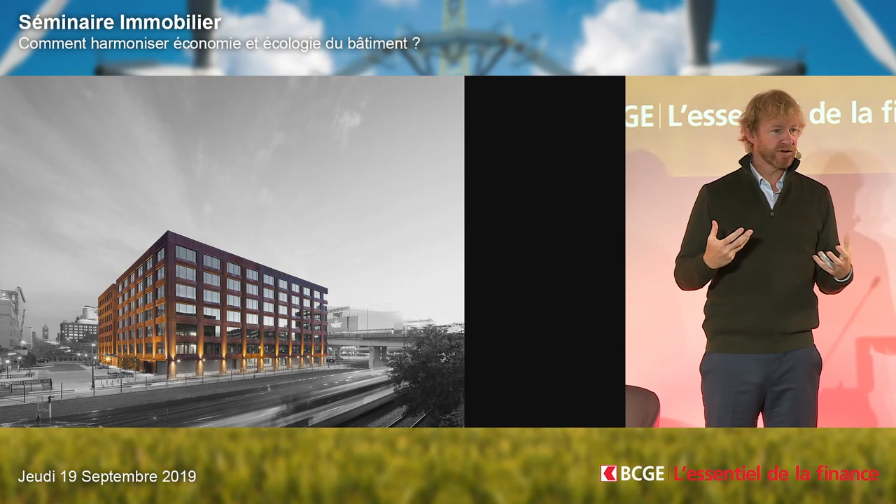They want to be in a funky neighborhood with good cafes and restaurants and a building of character. So why don't we go back to the way we built a century ago, these old industrial buildings? Why don't we build them in wood, and make space that actually works—we can wire them, they heat and cool well—rather than just renovating old buildings.

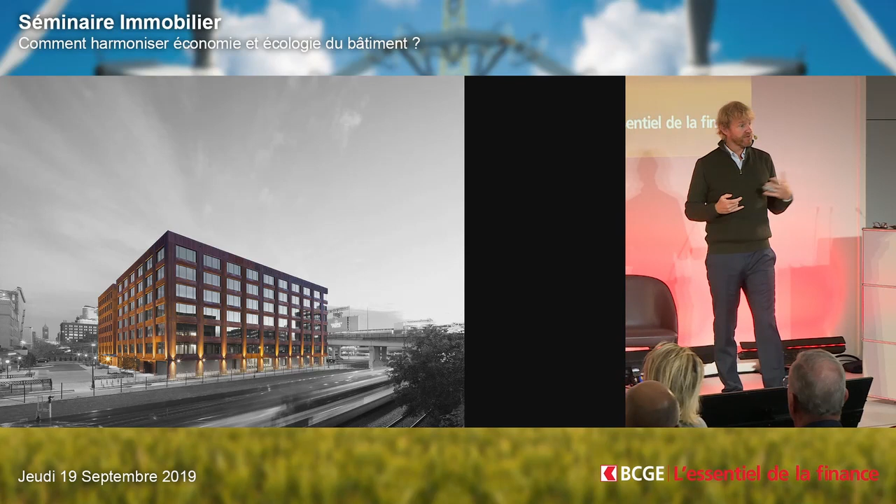Let's start building them again. So we built this building with them, in this case with what's called nail laminated timber. And it became, what's really interesting, this big powerhouse developer in the US, it became internally with their staff, who were mostly very skeptical of this. And this is only 7 stories tall. It's not very big, tiny for them, tiny project. It became the most important project they've done probably in the last 20 years, and the most popular with their own staff in the last 20 years.

And so what's happened for them is they've turned around and said, originally it was going to be 15 more of these. Now they're talking about 40, 50 more, and they have investors coming. And this is, for me, the most visited building I've ever built. And it's really very simple. But it demonstrates this desire people have to rethink the way they live, to rethink the way they work.

And to start building buildings again that maybe do reflect the way we built buildings a century ago. The technology is new, the fire science is new. The opportunity in seismic regions and earthquake regions like we live in are new. We can do these buildings really effectively and really cost effectively. And here in Switzerland, because you all have some of the best wood producers in the world, certainly the best fabricators, and I've been to a number of the shops here, it means that it's really an opportunity.

And right next door, what's happening in France, after the Paris Climate Accord, France said we need to actually put our money where our mouth is. We want to take responsibility around our climate agenda, and we are going to shift a huge component of our construction industry towards wood. So we were invited by the city of Paris over and over again to compete for projects, and we have a few projects in Paris. They go very slow, Paris projects go very slow for me.

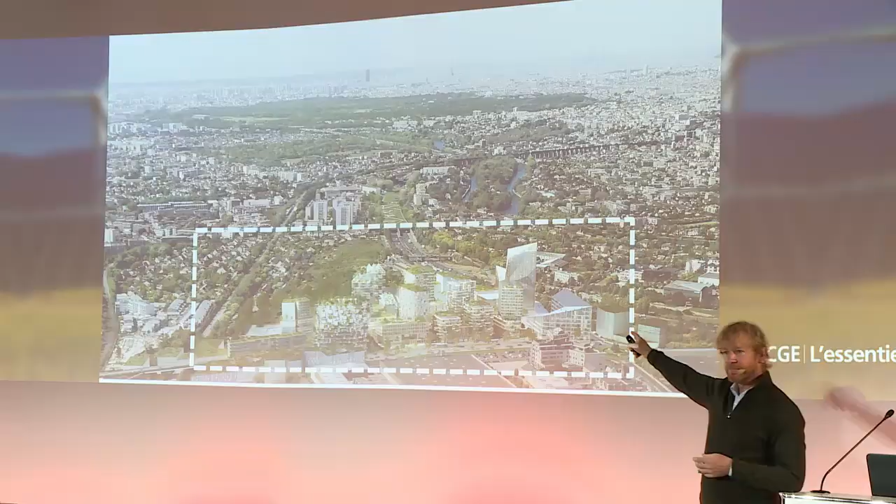Up at the top you can see the Eiffel Tower. So we are actually only doing 2 of these towers. On the right is Kengo Kuma, a wonderful Japanese architect who's doing a hotel, and we're helping teach him how to do these buildings in wood. And then some Milan firms and some French firms are doing the other parts of the project. But this is the scale of thinking now that's starting to happen in France.

And France doesn't actually have a timber industry. So they've said we need to do this, but they really don't have an expertise in it. They're importing the wood from Austria for the most part. And so it speaks again to the idea that policy around climate is shifting towards wood building.

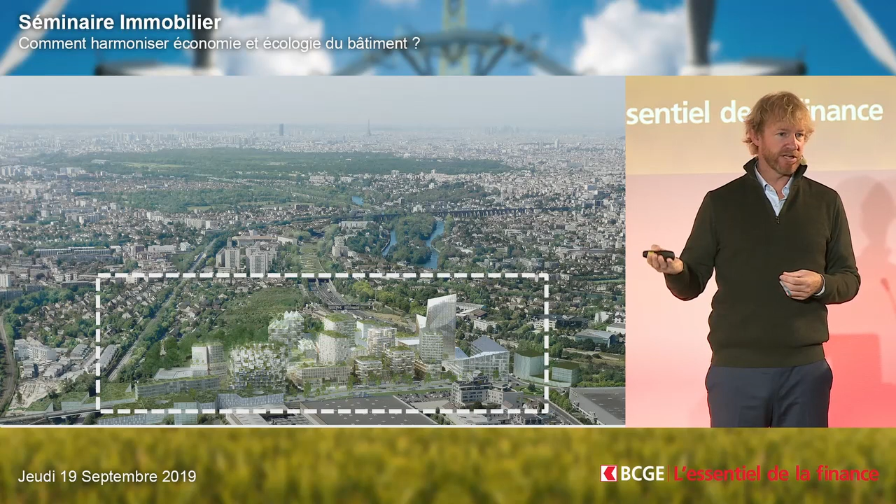And although your building codes here in Switzerland still need to evolve to allow this to happen more and bigger, that happens because of all of you stepping up and saying our industry is tired of doing it the same old way. Our industry actually understands how we can do better. And our industry is willing to take ownership of the 40% story that we all own if we don't do anything about climate. So I will conclude there, but I welcome you to consider wood in your future.